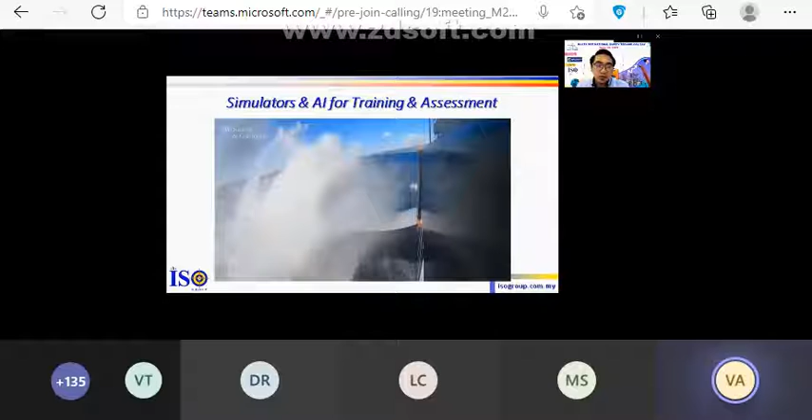He commented that our online training was very interactive. So what did we repackage? New old technology. Let's see what the ETNZ team does. The technology and design can really make the difference between winning and losing in the America's Cup, the oldest sports trophy ever.

The simulator started off as a little Gran Turismo-type steering wheel setup. It's now, in this campaign, a full motion massive surround screen machine with a very strong physics model behind it. You have a simulator that's completely repeatable.

If you give it exactly the same inputs, you can model the same weather conditions and the boat going through the same waves. So if we change the foil from this size to that size and run it again through exactly the same conditions, you can say whether it's better or worse, and measure that accurately.

However, to drive the simulator, you've got to have sailors involved. There's also human bias in the simulator testing. If they know a foil or rudder is bigger or smaller, they expect it to perform better or worse.

So what did we package? New old technology. For example, let's see what the ETNZ team does. The technology and design can make a difference between winning and losing. At ISO Group, we use simulators, VR, virtual reality, and crane lifting planner software, and so on.

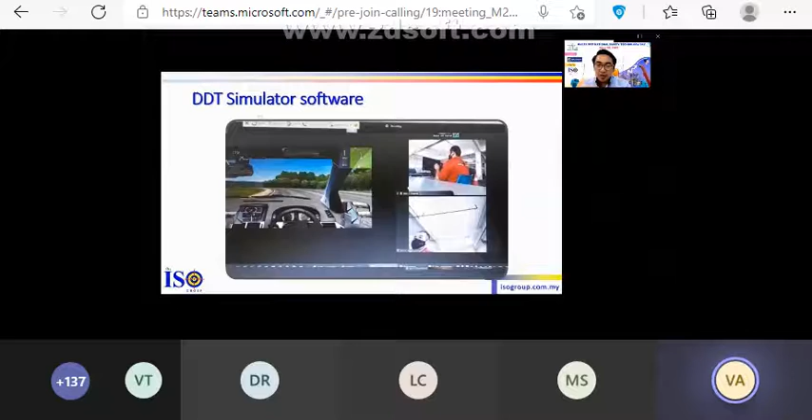It also provides different environments like day or night. I can turn the clock back or forth, make it sunny or rainy, and control the weather, as well as highway or town driving. I would not have the opportunity for these six different scenarios in a 30-minute actual in-cab drive.

Where necessary, we also have options for camera recording for real-time or delayed assessment if internet coverage is weak.

Apart from assessment via simulators, we also conduct on-site practical assessment. We use an online network to assess drivers by setting up several sets of cameras from different angles, connected to other participants' tablets outside the premises, and also online to assessors who can be thousands of kilometers away, like in Taiwan or East Malaysia. The assessor can look at it from a variety of angles.

The assessor can see the participant driving, how they're holding the steering wheel, the following distance, selection of the correct lane, entering a roundabout, recognizing and understanding hazards and action, the REA technique, and attention to other signboards, and so on.

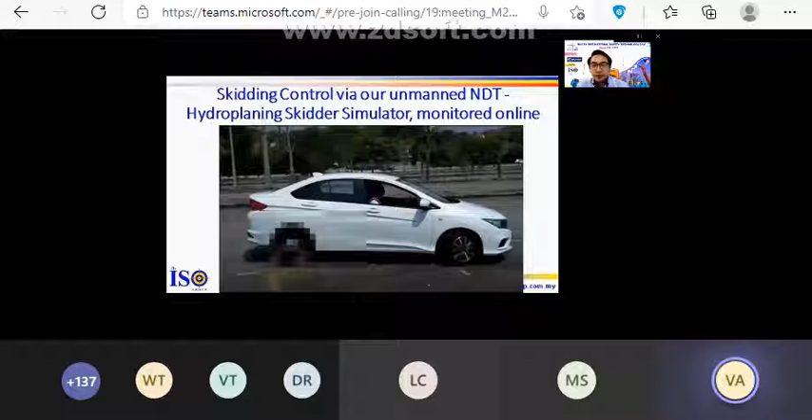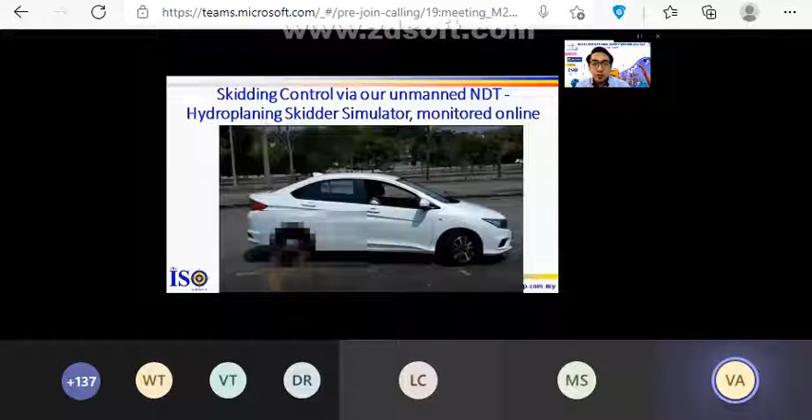At ISO Group, we even re-engineered a non-destructive test hydroplaning simulator, where our trainer does not have to be inside the cabin of the vehicle, to ensure social distancing, especially in a car cabin, which is a confined space.

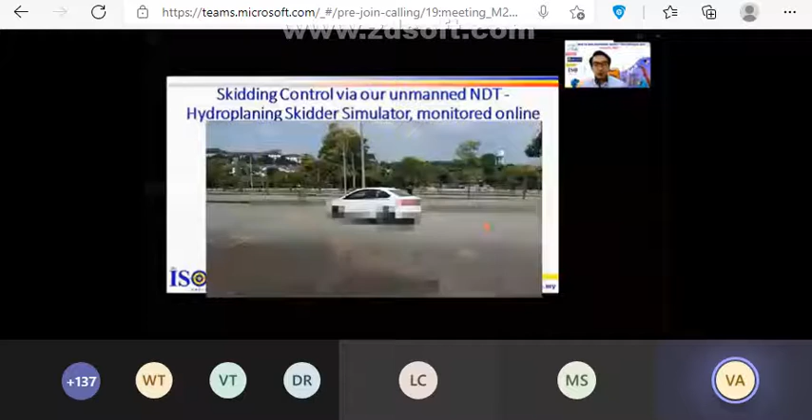We launched this invention and have since been conferred the first non-destructive test hydroplaning simulator by the Malaysia Book of Records. We proposed our VR online OTC inspection training and assessment to the Director General of the Department of Occupational Safety and Health Malaysia, and this program is now accepted by Petronas Group.

Our overhead travelling crane inspection practical is also conducted online.

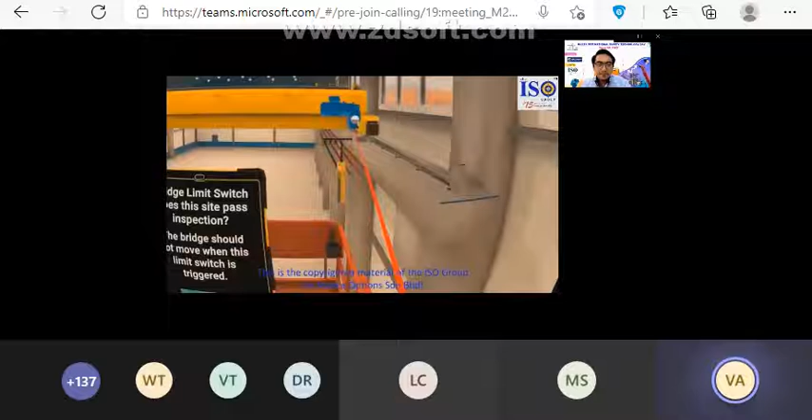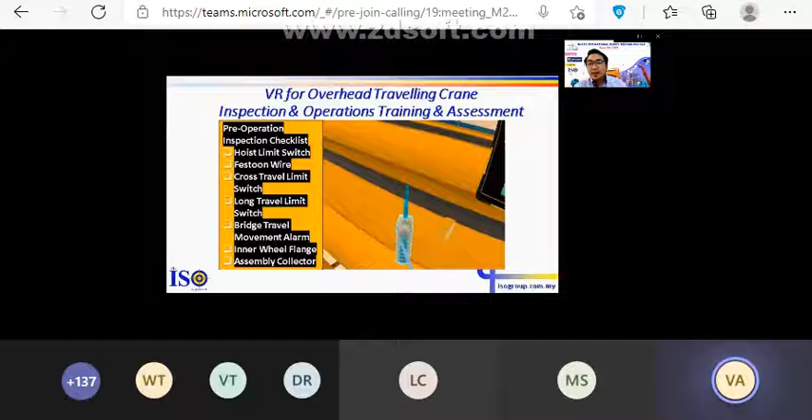It is a full range of inspection for overhead travelling crane, especially in competency training and assessment. Rigging and slinging, the practical assessment using crane expert simulation.

It is for better understanding and more explanation to participants.

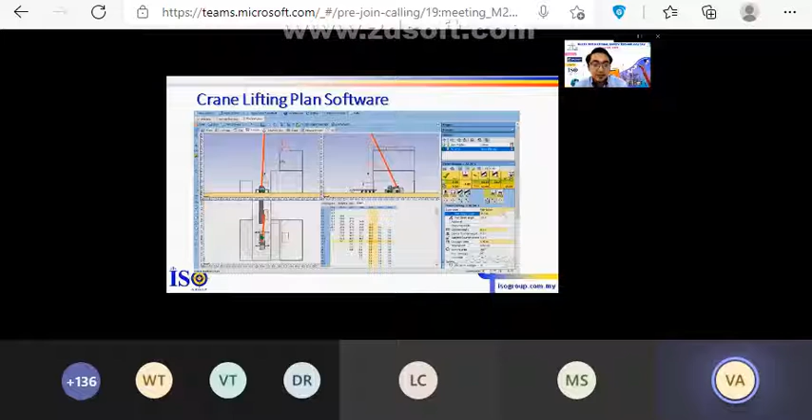It is a full set of equipment with accessories. We loan it to each individual participant for theory and practical training and assessment.

We provide a complete set of tablets with accessories like earphones, chargers, and cables. The tablet includes a SIM card for internet coverage, and a safety helmet with camera for the practical session, an internet router, and other cameras. We sanitize it before and after each training session.

Why do we send a tablet and accessories to each individual participant? We understand the pain point. Workers work from home, children also study from home. They can't use a home computer or tablet if they need to attend our online training. Hence, we provide all the tablets on a free loan basis, no extra charge, and free courier to and fro.

Suddenly, we are all living in a world where minimizing physical contact is a necessity. The advantage of wearable technology and using AI, VR, simulators, or software has become the minimum benchmark.

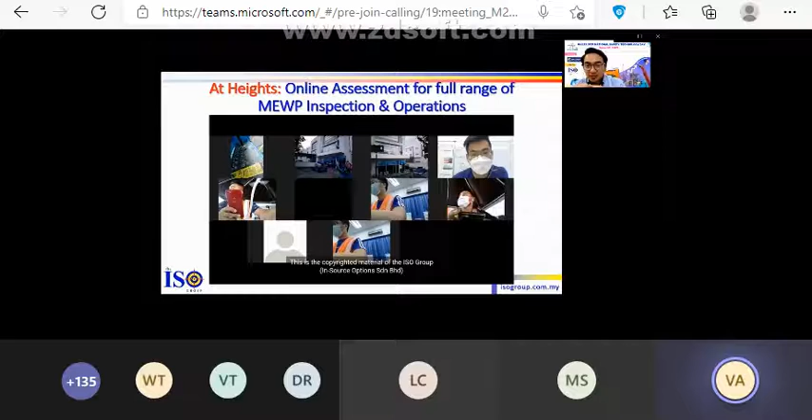The assessor can look at it from all angles simultaneously. That is the power of IoT. Trainees and workers maintain social distancing, with the trainer or assessor absent physically, but the assessor is there online with the operator. The assessor can fully see all the operator and assistant's hand and leg movements, their standing position, even their eyes or head movement.

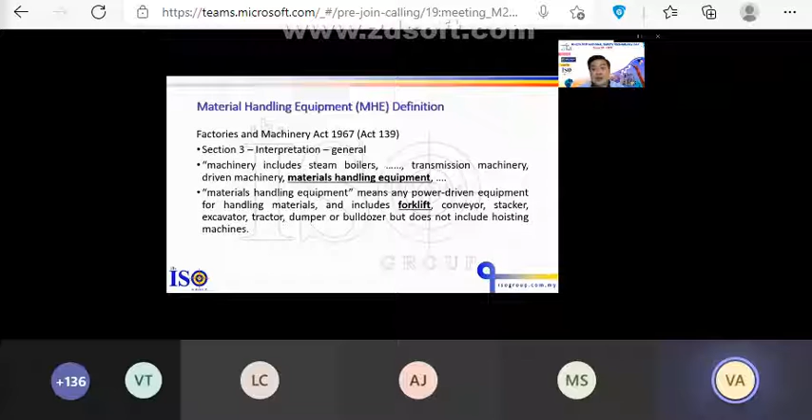Factory and Machinery Act 1967 of Malaysia. Machinery includes driven machinery, material handling equipment. What does material handling equipment mean? Material handling equipment means any power-driven equipment for handling materials, and includes forklift. MHE is now an item listed specifically under machines where the operator requires training. In the USA and other countries, there are laws that term it as powered industrial truck.

Section 26 of the Act: training and supervision of inexperienced workers. No person shall be employed in any machine or in any process, being a machine or process liable to cause bodily injury, unless he has been fully instructed and receives sufficient instruction in work at the machine or process, or is under adequate supervision by a person who has knowledge and experience of the machine or process.

So who determines the sufficient instruction, process, knowledge, experience, and who can supervise? Sufficient instruction and process will cover the tool set, skill set, incorporating load chart, use of other attachments, working in tight environments, minimum movement in darker environments, high-rack forklift operations. Much more than just the training given by another forklift operator based on years of experience. Is that good enough as per Section 26 of the Act of Parliament?

Does the experienced forklift operator know all the tool sets and skill sets I just mentioned? Does the experienced forklift operator want to be held responsible when an accident happens? On the other hand, does any external training company or trainer want to be responsible and go to court if called upon to attend as a witness, ambiguous in terms of his personal experience and certification? What is adequate training?

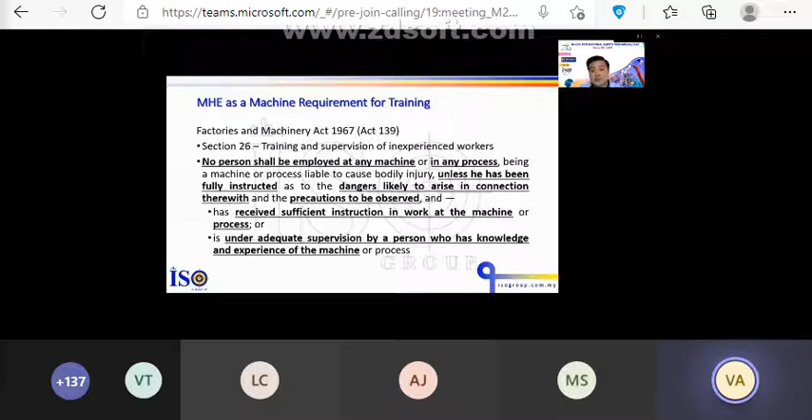Who selects the trainer? It is the safety, warehouse, or training manager. Thus, does this manager understand what is good training for forklift or reach truck suitable for the environment? In the last 18 years, our group can only remember one manager, actually a lady general manager from the UK, attached to a logistics multinational company, who could competently operate a forklift and reach truck.

This situation happened about 12 years ago. There was an HR training manager earlier haggling with Lieutenant Colonel Frank Tan regarding the number of training days and price.

Within 5 minutes of further discussion, the GM assigned the training to ISO group because she understood our detailed and complete system of forklift operation training. My further question is, do normal managers or coordinators sit in on the training sessions, especially when training is being conducted, to check what was promised is delivered by those trainers?

We came across many occasions where the training manager or coordinator showed us course content from another competitor training provider, let's call it Company A, which was a direct copy of our detailed training content. They asked whether we cover the contents as highlighted. Of course we said yes, and explained how it is conducted. Most of the time we asked whether it was what they were told, and they said, this is not what we heard from the other company.

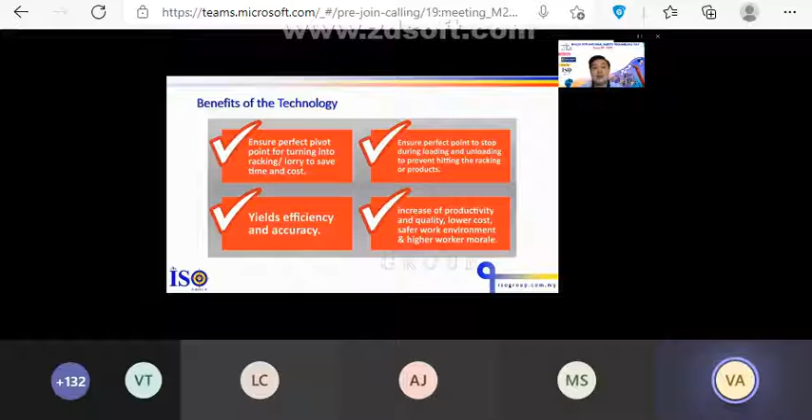Benefits include systematic maneuvering of MHE, not hitting obstructions on the floor, no downtime, optimal fleet size due to productivity in loading and unloading, and savings in equipment rental and maintenance costs. Other benefits include ensuring a perfect pivot point to turn to the side of a lorry or racking or stacking area, and ensuring a perfect point to stop. This yields efficiency and accuracy, increased productivity and quality, lower cost, a safer work environment, and higher worker morale.

This innovative method has been accorded a patent and won multiple awards in Best Innovation, Best Safety, Best Technology, and Best Training from many local and international safety and trade organizations, amongst them ROSPA of UK, ASSE now known as ASSP of USA, and the Malaysian Oil and Gas Services Council.

Our training is adopted by the American Petroleum Institute USA as a behavior-based safety MHE operation training, and our trainers are approved by API USA and various other institutions like the Department of Skills, which is the only government department legalized to issue Malaysian skill certificates in vocational training, blue-collar skill training, material handling equipment, and many other professions. This is all our 11 international and local awards, plus one more just awarded a few hours ago by our

MSLTA chairman, Dr. Noel Robert. This is our forklift, or reach truck - operators should realize that it has become big, very large, like the Bumblebee transformer, so it is easy to become involved in an accident because of its sheer size.

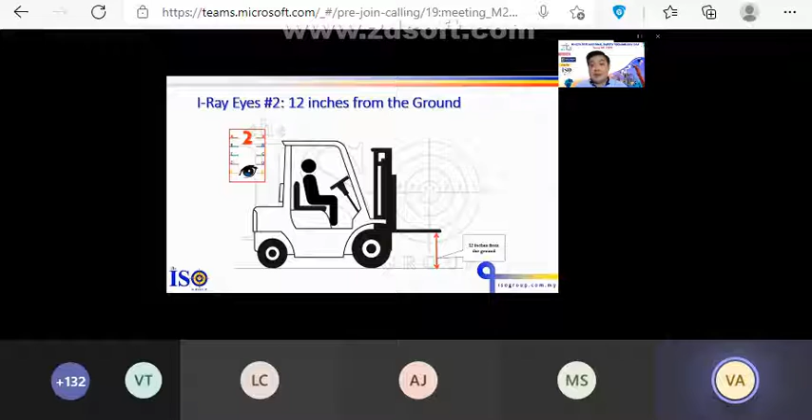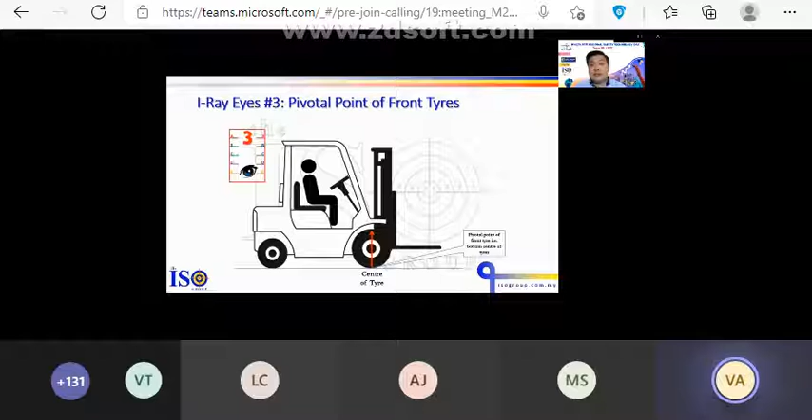Irrespective of the make or model of the forklift. In the case of a reach truck, the indicator is positioned at a different place.

I-Ray Eyes number 4 indicator is positioned at a suitable place of the forklift with the line of sight aligned to the safety line next to the racking or stacking area, or a suitable place next to the lorry, when the tip of the fork is squarely at the safety line.

This indicator is used when the forklift operator performs loading and unloading of a large load. No need to worry that the fork will hit the lorry tires or other pallets on the racking, whether the fork is going up or coming down.

I-Ray Eyes number 5 indicator is positioned at a suitable place of the forklift with the line of sight aligned to the safety line when the backrest of the fork is parallel to the safety line.

This indicator, used concurrently with our standard 2-step method of loading and unloading, will ensure that the backrest does not hit the pallet on the upper racking.

In an incident maybe 8 years ago, the upper load was pushed by a backrest and the pallet with load was pushed down over the other side of the racking. The load dropped and killed the forklift operator's own mother, who was working as a warehouse picker.

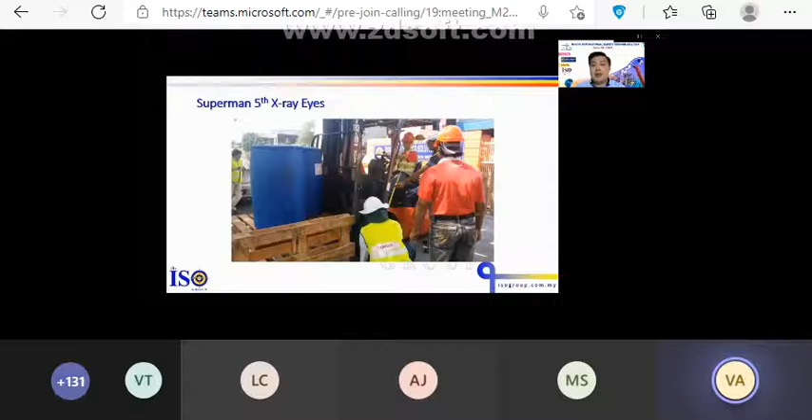The boss of the factory asked us to conduct the forklift training the day after, with a condition to backdate the training certificate. Lieutenant Colonel Frank declined the request. That brings up the subject of whether a trainer will be held responsible for improper training.

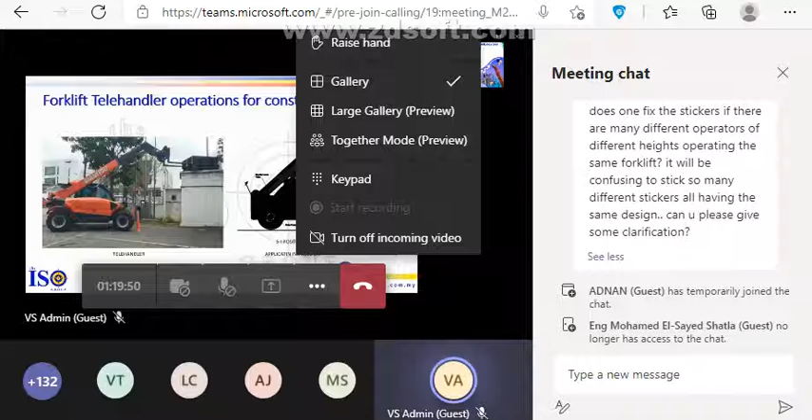This picture shows that the 5th X-ray eyes technology can also be used in forklift telehandler operations.

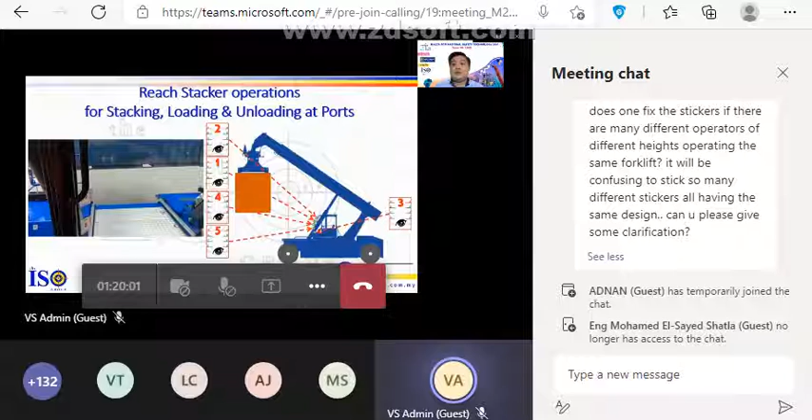Now I will show a video of how the 5th X-ray eyes is implemented for use on a USD 1.7 million, 72-ton reach stacker. Before that, let me narrate a real case study at a seaport in Selangor, Malaysia.

A reach stacker operator was lifting a fully laden container from a stack of many others. The container was lowered from a high stack to the ground level. He was not aware that the container was too low and touched the ground.

When he reversed his reach stacker, the container was dragging on the floor. The reach stacker was holding the fully laden 40-foot container, with total container and load weighing about 31 tons on its spreader. The twist lock on the spreader was literally torn off.

The reach stacker, just like a crab without its claw, became incapacitated and was left idle, having to wait a few months to be repaired. I hope you can understand the loss of productivity from the reach stacker.

Luckily, they had another reach stacker. The Bangladeshi reach stacker operator learned his operation skill from trainers who do not use the 5th X-ray eyes technology. Now we will go into the video.

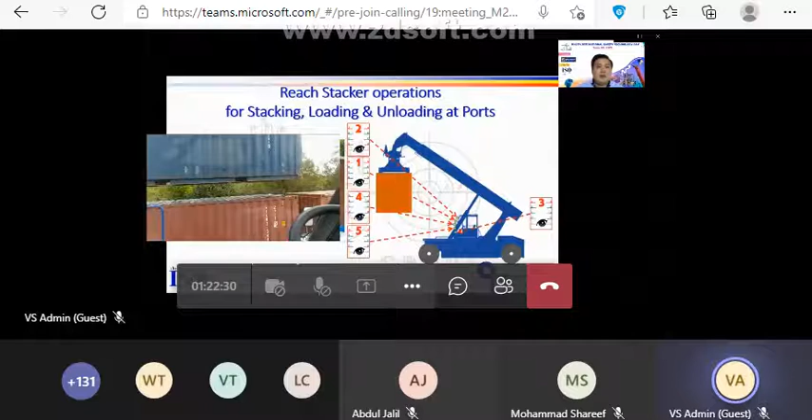Eyes number 5. Squarely going in. Okay, once you squarely going in, we reach number 5, then we will stop. Then we will put our container squarely on top of the container below. So we put it down.

So squarely, is it squarely? Yeah, it's squarely, then only we put down. After we put down, yeah, we open the twist lock. Then twist lock open, then we rise up our boom, our spreader about 1 feet.

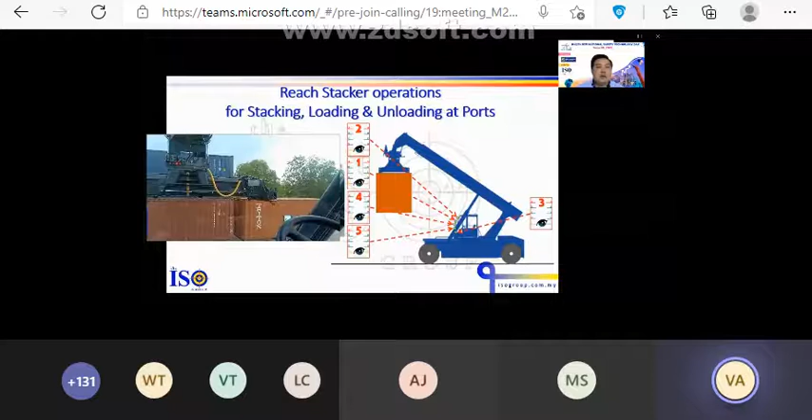After 1 feet, we must make sure it's clear. Once it's clear, then we rise up to 2 feet, then only we reverse out from the container. Once we reverse out, make sure we reverse until number 4. Once number 4 is reached, then we move lower down our boom to number 1, the spreader to number 1. After that we reverse out from the loading and unloading place.

Thank you, ladies and gentlemen, for your attention.

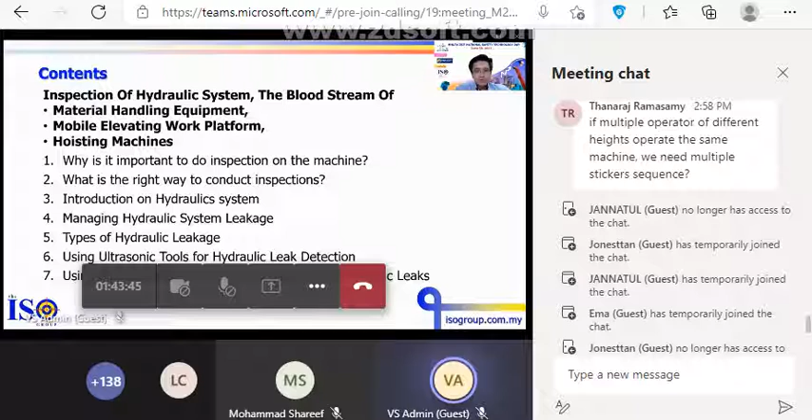Now allow me to introduce my topic. My topic is inspection of hydraulic systems, the bloodstream of material handling equipment, mobile elevating work platforms, and hoisting machines. Now let's get to the contents. Here is my list of contents. Number 1, why is it important to do inspection on the machines? I will show you two incident pictures. Number 2, what is the right way to conduct inspection? Number 3, introduction on hydraulic systems - I will introduce the basic concept of hydraulic systems.

Number 4, managing hydraulic system leakage. Number 5, types of hydraulic leakage - we will talk about external and internal leakage. Number 6 and 7 are some of the ways and advanced tools that we can use to help us in the inspection. We will look into ultrasonic tools and also black light sensitive dyes.

Let's get into the first topic - why is it important to do inspection on the machines? Here is the picture of a real incident that happened. I cannot say where or what company here. However, this is a reach stacker - they are used for lifting cargo containers, usually for stacking containers at a seaport or inland ports. What happened here is one of the hydraulic systems was leaking and then it caught fire.

Luckily, there are fire extinguishers on the machine. So with the quick action by the operator, they prevented more catastrophic incidents from happening.

Most people think it is not important to do maintenance or inspections because the reach stacker is seldom used, or maybe used less because of this Movement Control Order, MCO. But now, as the incident happened, it is a loss for the company, because they lost productivity as the machine took some time to be repaired.

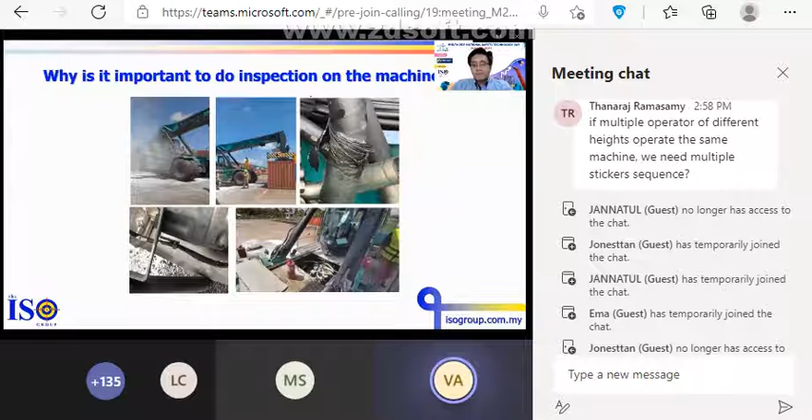Next is the incident of hydraulic system failure on a forklift. As you can see here, the hydraulic oil burst out straight to the operator while he tried to raise the fork mast. Luckily, there was no load on the mast when this happened. If not, the load could topple down and hit the racking system. But still, because of this hydraulic oil, it spoiled their product as it is not food grade.

From the incident, what can you think? What is the root cause here? For me, it could be because no operation inspection is done, or maybe the operator does not know where to inspect. It could be because the cable tie for the hydraulic hose to the mast broke, therefore the hose grazed into the nearby chain. Or also it could be because of the maintenance team's fault — the operator had done the report, but no action was taken by the maintenance team.

So the important thing here is to do inspection for this machine properly. Then we can reduce or prevent such incidents from happening.

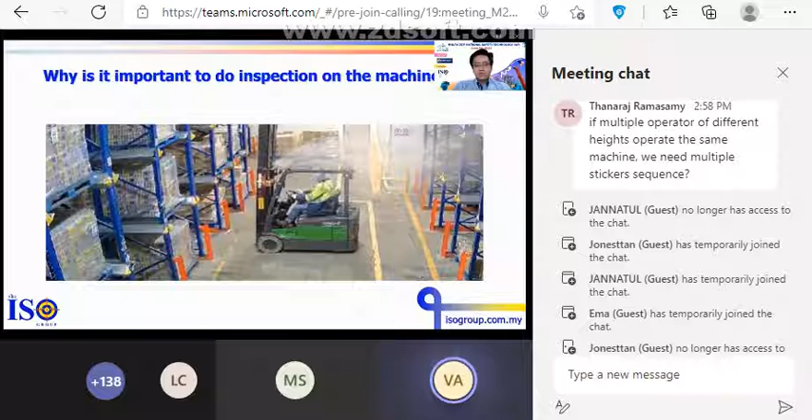Now let's discuss further on the importance of inspections. Number one is for safety, but whose safety? Actually, it's not only for the safety of the operator, but also for other workers and people nearby.

For example, in a crane lifting operation, if any incident happens, it's not only dangerous to the crane operator, but also dangerous to the lifting team working below.

Number two is problem prevention. When we do inspection, we can identify any issue faster and at an earlier stage. With regular inspections, the maintenance team can fix the problem before it causes more severe issues.

Next is increased productivity or increased uptime for your machines, meaning that you can finish your project within the scheduled time.

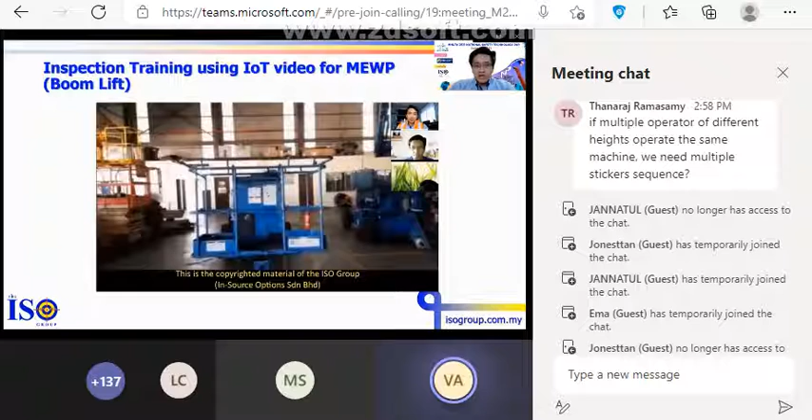Next, I will show you how our company does inspection using IoT during this COVID-19 pandemic. Let's play the video.

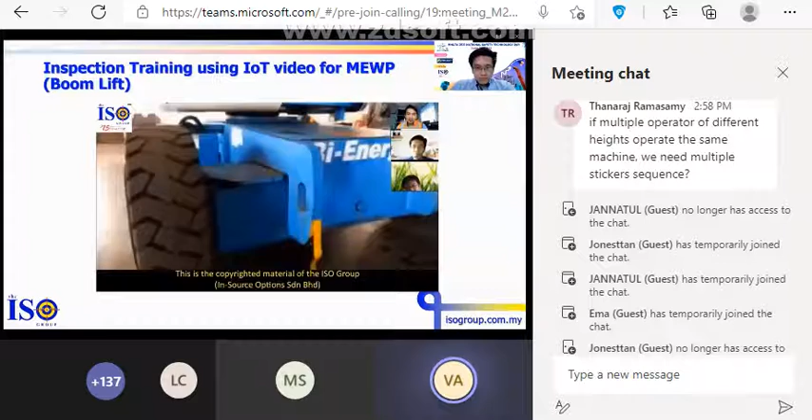Now we do inspection for boom lift. We do visual inspection. We look at the structure here, we look at the hose, we look at the tire, all the nuts, all the decal and sticker. We check the battery.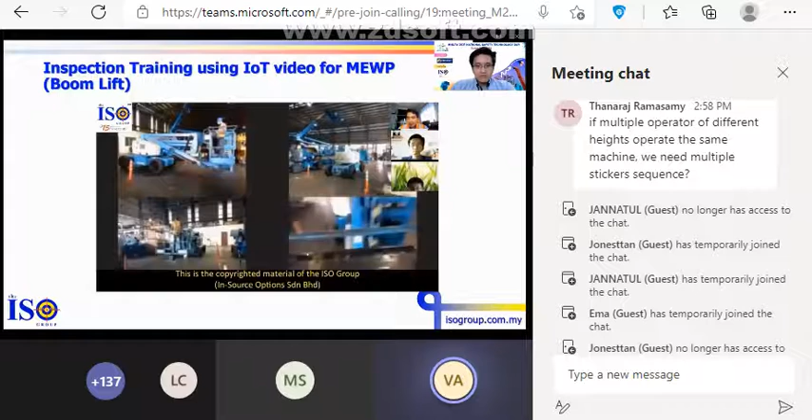Now we check the functional of the machine. We go up, we go down, we move forward, we move backward to check the brake, to check all the steering hydraulics. We extend the boom, we swing the boom.

Now, new topic, introduction on hydraulic system. Let's look at the definitions. The hydraulic system uses a fluid under pressure to drive machinery or move mechanical components. The complexity of the hydraulic system depends on its specific use. However, all hydraulic systems work through the same basic concept.

This picture shows a basic concept of hydraulic circuits. As you can see, the basic components for a hydraulic system are the reservoir tank, the oil filter, the pump, the pressure line, the relief valve, the control valve, the piston, and the return line.

So how does it work? The hydraulic oil from the reservoir tank will be pumped to the cylinder. It will bypass the relief valve and the control valve, so the control valve will direct the fluid into the specific piston or cylinder. The pressurized fluid will push the rod forward or move the rod attached to the moving component of the machine. Then the low pressurized fluid will return to the reservoir.

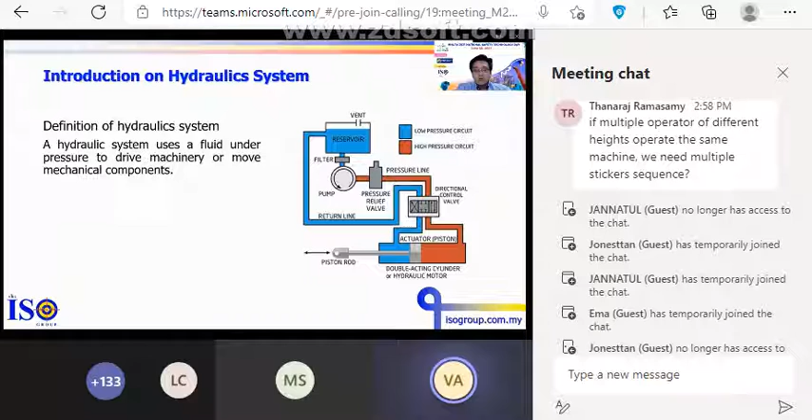This is just the very basic of hydraulic circuits. As you can see, if any component is broken, it will affect the whole hydraulic system. Let's see the basic flow of hydraulic system in our machines.

Next topic is managing hydraulic system leakage. It is really unfortunate if we cannot identify any leakage on our equipment, but it is even worse if the leaks identified are left to drip away. In some cases, they don't bother to repair the leak because the leaks are very small, so they just top up the hydraulic fluid if the level is low. Actually, we lose more than the fluid cost.

Our profit goes to unnecessary energy consumption, our equipment performance reduces, our machine reliability decreases, we increase our housekeeping cost, and our maintenance cost also increases. But not to forget, these small leaks can damage our whole hydraulic system because it can severely affect the hydraulic system for the machine.

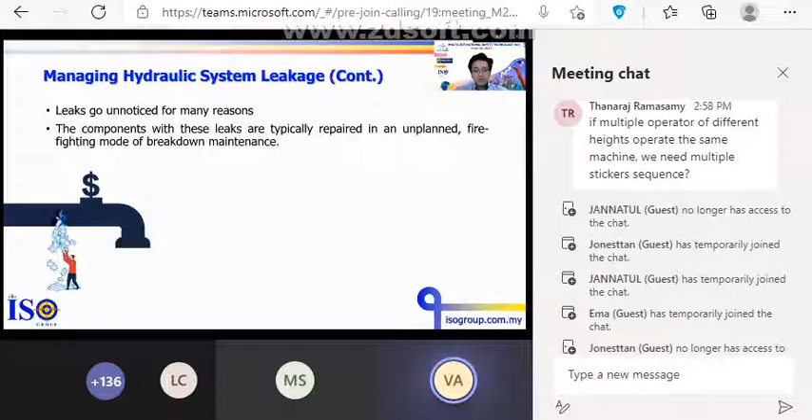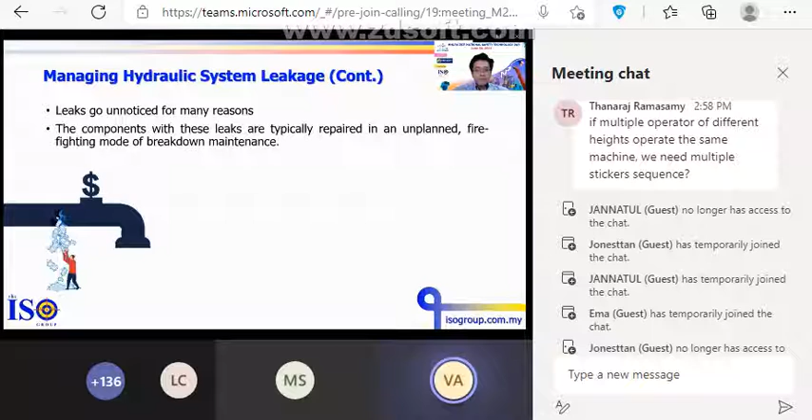Next, leaks can go unnoticed for many reasons. This is because there is no visual indication to alert the operator or technician until the system has been severely affected. The component with leaks is typically repaired in an unplanned firefighting mode of breakdown maintenance.

Then I will talk about the types of hydraulic leaks. Before you can identify and control hydraulic system leakage, you need to know there are two types of leakage. This is something that every company with hydraulic assets should be interested in. The hydraulic system can leak both externally and internally, causing different issues and requiring different solutions. This problem can be tackled in a variety of ways.

For example, number one, make a simple lubrication change. Number two, use advanced technology tools to help detect and manage the hydraulic leakage. Both of these solutions I will elaborate more later, but keep in mind that the key here is to approach with faster, earlier detection, and fast response.

Now let's move to external leakage first. External leakage is the most recognizable type of leakage. Even the untrained eye can easily spot a broken hose spewing oil. This type of leak is typically repaired quickly because it affects the production line or process.

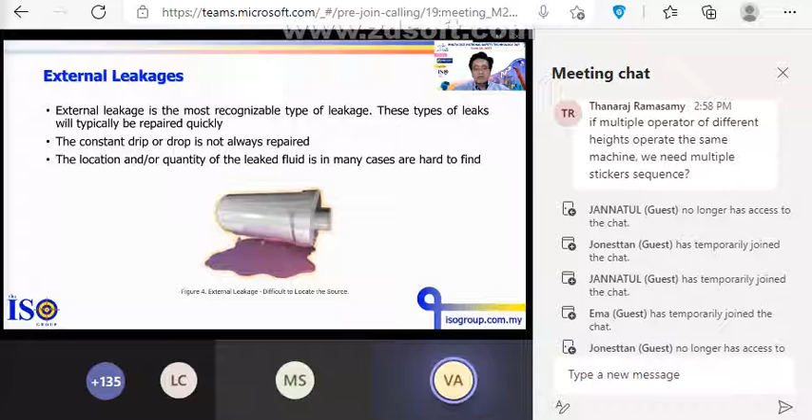But sometimes a constant drip or drop is not always repaired because the system performance and production are not affected, so they just let it be. In some cases, the location of the leak is really hard to find and the repair is not worth the effort, so they also just ignore the leaks. Eventually, many companies spend tens of thousands of dollars a year replacing top-up fluids because they don't really understand the financial impact of a leakage.

Therefore, the detection and quantification of fluid consumption is the first step in external leak control. One way is to maintain an up-to-date reservoir management to determine when, by whom, and also by how much fluid was required to top up a reservoir. This record should be used along with visual inspection to determine the location and the leak rate of the hydraulic system.

This is the leak classification table. It can be used as a method to quantify the leakage rate, and the location will allow for the opportunity to prioritize the repair. From this table, there are 6 classes of leakage. A higher number represents a higher leakage rate.

In many cases, the source and quantity of the leaks cannot be determined as they are difficult to see. Best practice recommends occasionally cleaning the area and fully wiping down the equipment to examine the leaks.

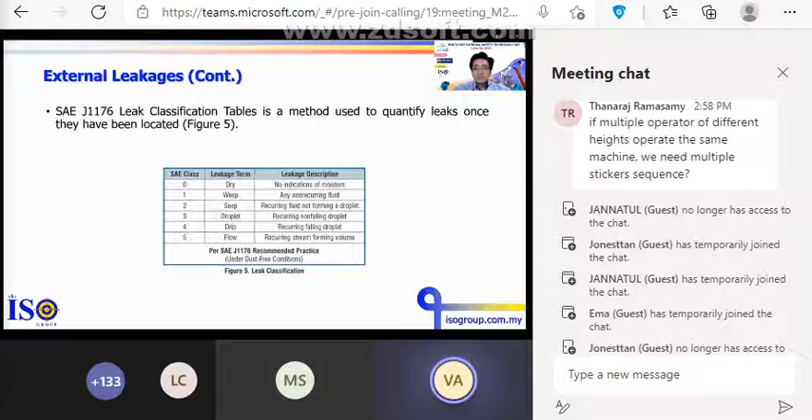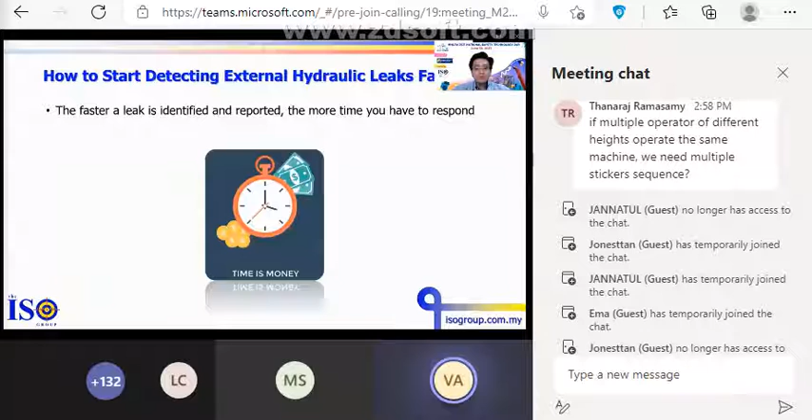Now we're looking at how to start detecting external hydraulic leaks faster, because the faster a leak is identified and reported, the more time you have to prevent problems like a last-minute breakdown or total damage to your hydraulic equipment. There are many ways to help yourself, maintenance, and operators identify leak problems more quickly. Now we look at some of the methods.

In order to detect external leaks faster, we should consider using hydraulic oil with a distinctive color. When using a specific or distinctive color compared to other lubricants and fluids for your equipment, this can help us identify leakage faster. With this method, both skilled and new staff can easily identify the leaks.

The next method to help detect external leaks faster is to properly train your staff. They need to know where to look, what to look for, and how to report it. They have to inspect all hydraulic components to see any leakage. If the hydraulic oil used is a different color, it's easy to instruct them to report it, for example, green fluid leaks or whatever color your hydraulic fluid may be. Then the maintenance teams can take immediate action.

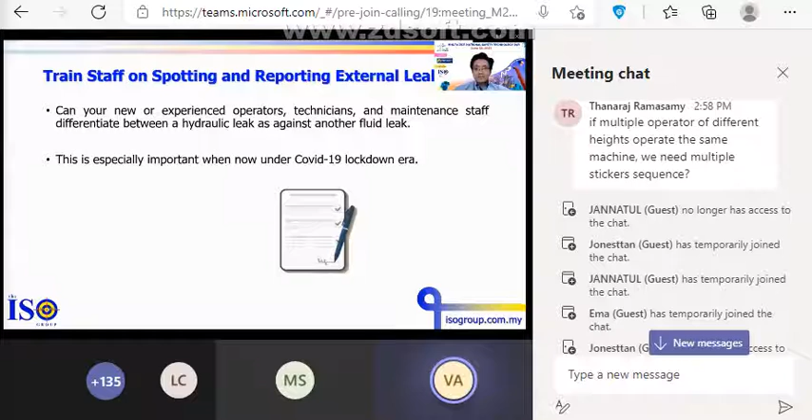To do the repair. Next, I will talk about internal hydraulic leaks. Not all hydraulic leaks are visible or even necessarily bad. What I mean here is that for internal leaks, there are planned hydraulic leaks and unplanned hydraulic leaks. The vast majority of hydraulic systems in operation today have leaks that are planned.

For internal planned hydraulic leaks, they are designed with a specific function in mind, and in many cases, they are documented by the original equipment manufacturer (OEM) as an amount of acceptable leakage under normal operating conditions. Typically, this internal planned leakage is meant to lubricate, clean, and cool a specific component or area of the machine.

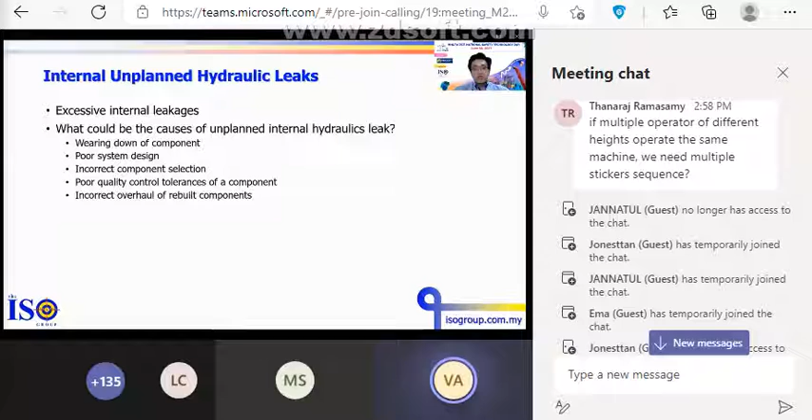Internal unplanned hydraulic leaks are the area you all need to be concerned about. The list here shows the most common causes of unplanned excessive internal leakage. Number one is the wearing down of component surfaces during operation, for example, a worn seal or a worn cylinder barrel.

Next is poor system design or incorrect component selection, which may happen during manufacturing or maintenance. Next point, poor quality control tolerance of components, which is also related to the manufacturing of the components.

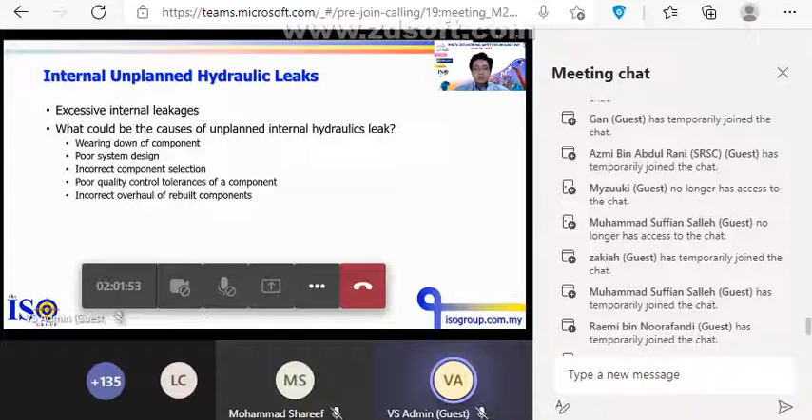Last point, incorrect overhaul of rebuilt components. That's why you need to keep in mind that a thorough inspection needs to be done every time after the equipment undergoes a major maintenance repair.

Now let's see the first warning signs of excessive internal hydraulic leaks. The signs are a decrease of system performance or reliability, and also an increase of operating temperature. If you notice any of these signs on your hydraulic system, there is probably excessive internal leakage happening in your machine.

A common scenario is when a major power loss in the hydraulic system occurs. It's usually because of internal leakage in the pumps and motor. This leakage is the result of excessive clearance within the pumping mechanism of the pump and the motor, resulting in reduced volumetric efficiency.

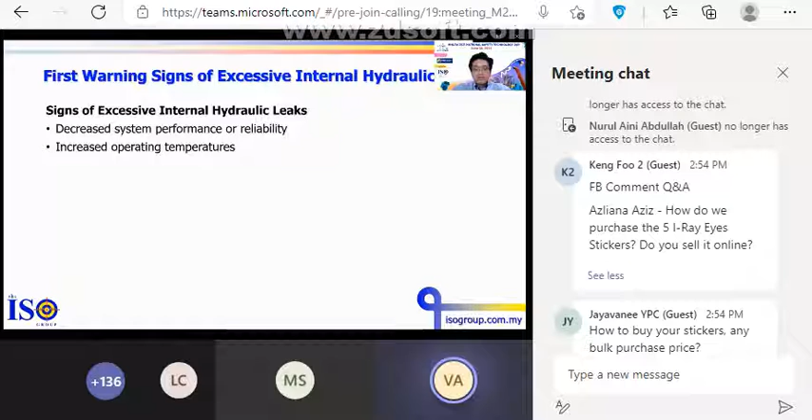Slippage is a common term that we use to describe the volumetric loss, and it is typically identified when the input energy remains the same or higher, but less work is being performed in the hydraulic circuit.

Here are more examples of internal leaks. In a spool valve, excessive internal clearance between the spool and the valve body could decrease the control and stability of the hydraulic circuits and their functions.

Energy loss is the result of energized fluid being allowed to escape back to the reservoir through a spool valve that has an out-of-spec clearance problem. A relief valve or other spring offset valve with a weak spring or a jam-open condition will have the same effect of fluid energy loss by allowing the pressurized fluid to bypass the working circuit.

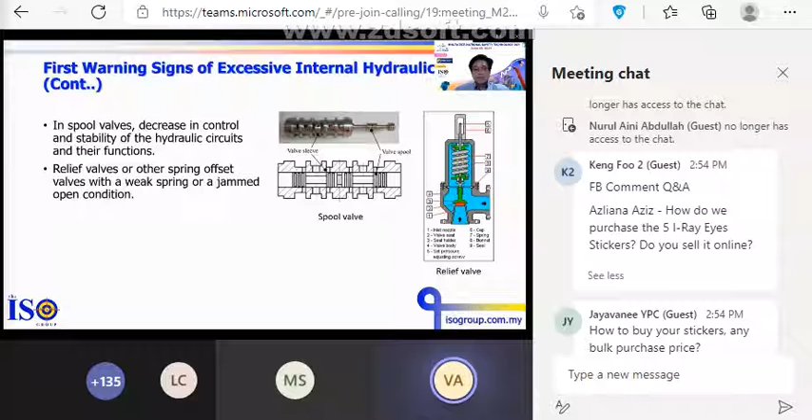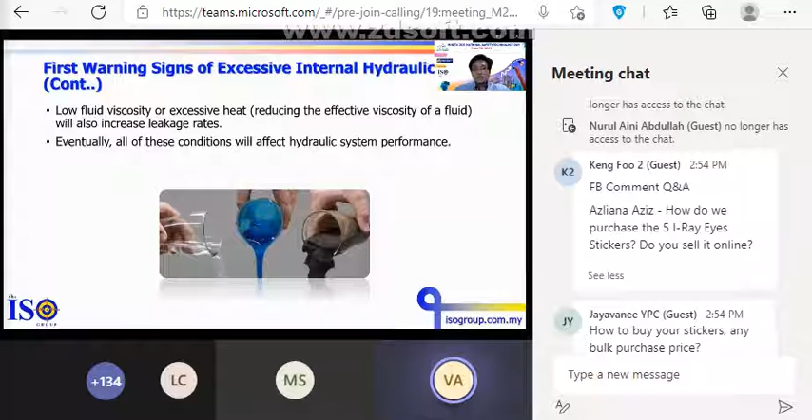Another sign is excessive heat. Excessive heat can reduce the effective viscosity of a fluid, and this will also increase the leakage rates. These types of internal leakage reduce system performance and decrease the fluid film strength, which will also result in premature wear of the equipment surfaces and the fluid's properties. Eventually, all these conditions will affect the hydraulic system performance for your machines.

Next, how to detect internal hydraulic leakage. You can use a non-contact infrared thermometer to help measure the operating temperature of your equipment.

Heating of hydraulic fluid during operation is caused by inefficiency. Where there is a pressure drop, heat is generated. Therefore, if there is internal leakage, it will increase the heat load on the system and can cause it to overheat. With this kind of tool, you can identify and change the faulty component.

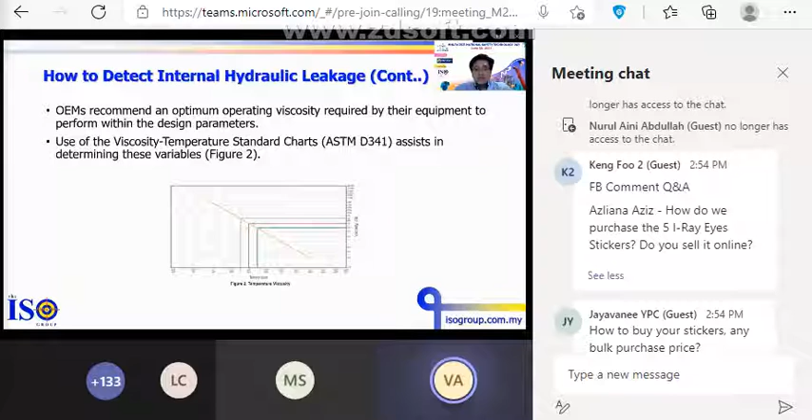In many cases, selecting a fluid and maintaining an operating temperature which achieves the OEM recommended viscosity becomes the responsibility of the end user. So you can use viscosity-temperature standard charts to assist in selecting the fluid and maintaining the operating temperature, especially at the critical components of your machine.

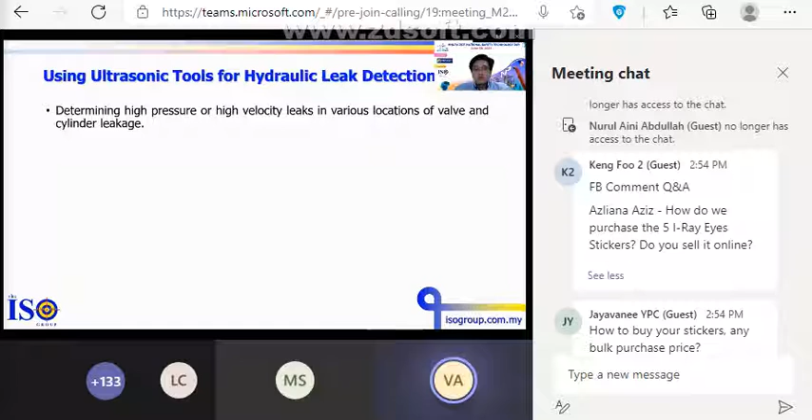Another great method here is to use ultrasonic tools. Ultrasonic detection has proven to be another effective method of determining high pressure or high velocity leaks in various locations of the valve and also in the cylinder. These methods assist in localizing the internal leakage, but similar to temperature reading, the results are not quantifiable into the amount of leakage.

Another great method here is to use black light sensitive dyes. This liquid dye is formulated to be compatible with the existing hydraulic fluid and the mechanical surfaces. The dye is mixed into the reservoir, then the mixture will emit a bright green or yellow glow when struck by the ray of black light. As shown in the picture, you can easily spot the leaks.

On the hydraulic hose here, this method is great when the leaks are too small or too numerous to see clearly, and it can also help maintain the exact location of the leakage in the equipment.

Here are simple steps that are a great place to start improving your hydraulic leak detection and management with very little associated cost or effort. Start by taking a closer look at your record keeping and surveillance to understand the trends over time. By matching this data with a robust plan for performing repairs, significant progress can be made for your hydraulic work equipment.

In summary, I hope now when we think about hydraulic system leakage, we know there's a lot of issues associated with it. We are losing power, we're losing reliability of the machines, we're losing the fluid, we're losing time, and of course, we're also losing money. There is so much cost related to this, not only the fluid cost, but also the downtime, handling cost, and waste management cost, and the list will keep going on.

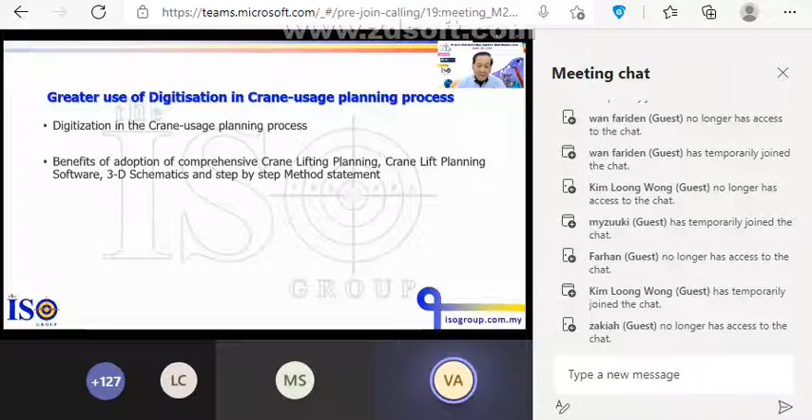New building materials and innovative construction approaches, such as pre-assembled modules, can lower costs and speed up construction and shutdown turnaround time, while improving quality and safety. However, this will require more sophisticated, specialized transportation, lay-down mode requiring upturning upon arrival at destination, and crane lifting efforts due to its sheer size, off-balance, and non-uniformed asymmetrical load.

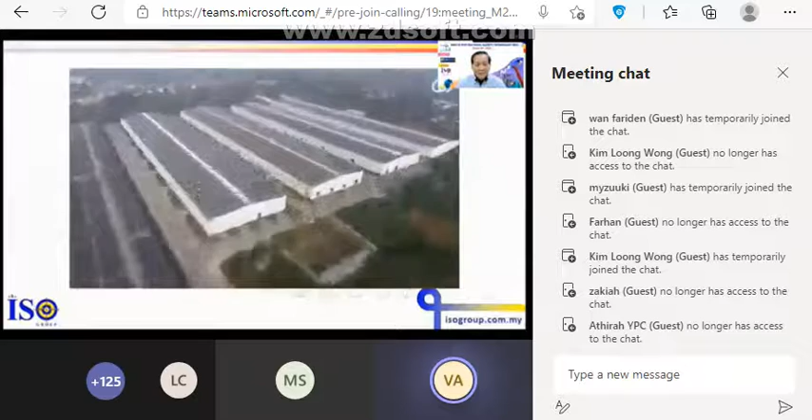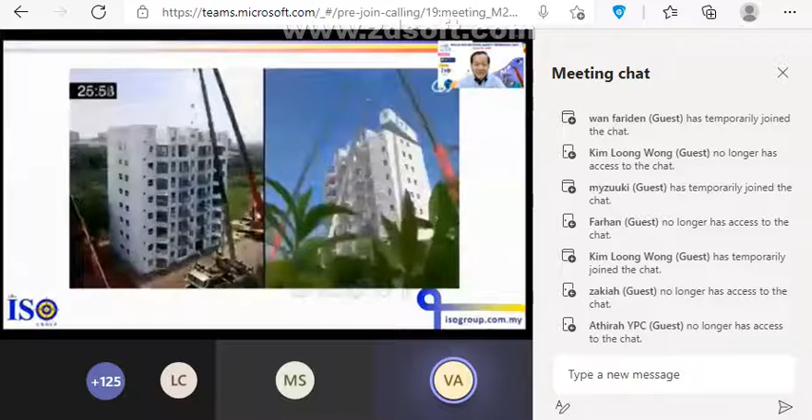Oh, modular. Already. Lift it up by this. Okay, and it's ready. How nice. Fast. Clean.

Project owners often believe that their responsibility ends when they award the contracts. They forget that they pay the economic cost of delay. On the other hand, contractors often do only the minimum required to meet contractual terms. Given the construction industry's poor track record on innovation and adoption of new technologies, tools, and approaches, we feel that both project owners and contractors need to adopt a new mindset for their own welfare.

Singapore Building and Construction Authority confirmed that prefabricated, pre-finished, volumetric construction (PPVC) gives a positive impact: productivity improvement of up to 50%, minimal dust and noise pollution, and improved site safety. An ecosystem should be built to benefit the whole society.

In view of the large number of more than 30,000 cranes in operation in Malaysia, and a large number of recorded accidents - I repeat, recorded accidents, I don't know how many are not recorded - it is pertinent for us to discuss today how digitization, especially using crane lifting software, can help in eliminating accidents.

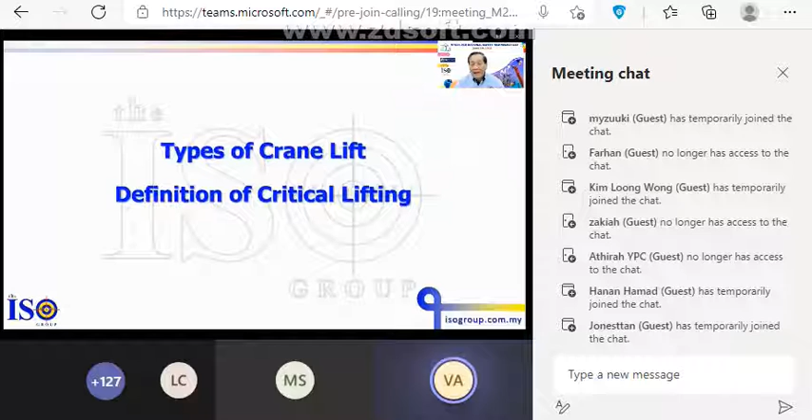In which a lifting plan is necessary, when it can be best counted only by a lifting software. The International Standards Organization number 12480 Part 1 of 1997 clarifies the safe use of cranes. But how many people do follow it?

Many industry players and organizations, committee members locally and abroad, do not take the lead or even go against the best practices, whether in poor crane deployment, maintenance, or training requirements. We see their cranes involved in accidents. Very sad. On further investigation, we notice that all these can be avoided.

There must be a wake-up call for all stakeholders, inclusive of the general public, to look into this very urgently. Standards and regulations include the ISO Standard 12480 Part 1 I just mentioned, BS 7121 Part 1 of year 2006, which is the British Standard for Code of Practice for Safe Use of Cranes Part 1, and British BS 7121 Part 3 of year 2000, the British Standard Code of Practice for Safe Use of Cranes for mobile cranes.

And we also have the International Labour Office Safety and Health in Ports Code of Practice from 2005, and the Accident Prevention Regulation for Cranes, BGV D6, issued by the German Institution for Statutory Accident Insurance and Prevention, and many more overseas and locally. The current operational safety practices at most construction sites and upstream manufacturing companies using mobile or crawler cranes is very, very lacking.

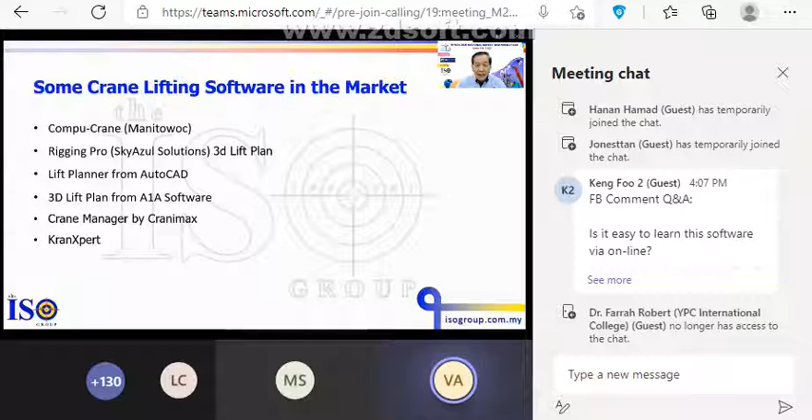Some of the notable lifting software we want to talk about are Compu-Crane of Manitowoc, Rigging Pro, SkyAzul Solutions, Lift Planner from AutoCAD, the 3D Lift Plan from A1A Software, Crane Manager by Cranimax, and of course the KranXpert - we love KranXpert.

Compu-Crane Manitowoc is a basic, easy to use tool, suitable for simple lifting, bidding, or presentation purposes. You need it for bidding or even presentation.

For more complex lifts, you need, in our opinion, a more sophisticated software. Rigging Pro from SkyAzul Solutions complements the Compu-Crane software. It automatically develops a sling model and applies the sling hardware properties, structurally analyzes each element for quick confirmation through a color-coded 3-dimensional image. It defines load dimension, the hitch type, and adds hardware like collector rings, shackles and fittings to the rigging plan, with a useful interface and a database of Crosby's hardware and anything else you want to add.

It provides detailed working drawings of the load and rigging with specs and bill of materials. You specify the load parameters and the hitch type. It calculates the center of gravity and sling tensions, and displays your rigging assembly in 3 dimensions. The load can be viewed from all sides, it calculates the loads, evaluates the capacities, and even alerts you of any potential hazardous situations.

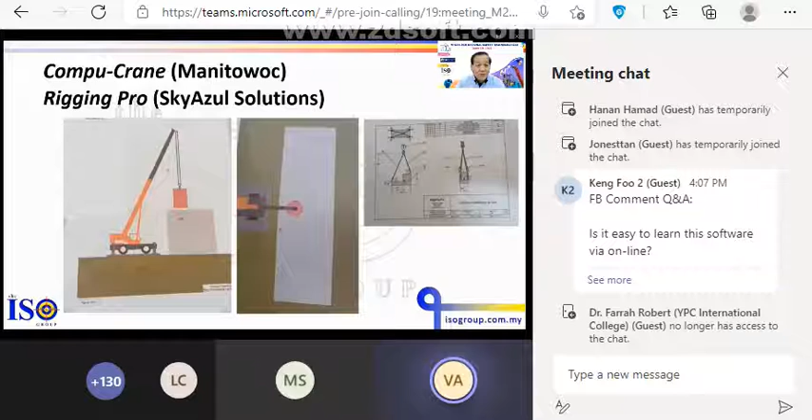In the case of Lift Planner from AutoCAD, a 3-dimensional lift study can be produced at the end, but you need to actually know AutoCAD - otherwise it will be quite useless to you.

It allows configuration of the crane. You move the crane, swing the boom, set the hook elevation, and boom up or boom down. You can also do telescopic adjustments or change the jib angle - that's where you see what happened. You cannot do this in the real world of work because it's not allowed when the load is hanging on the hook.

But many people perform it in the world of work, and that's where you see a lot of crane failures. Lift movie comes along for presentation and also for pre-lift meetings.

Very useful. The other one we know of is 3D Lift Plan from A1A Software. This program is graphically very nice. It is sophisticated for simple jobs, not restricted to any crane type, and linked-back crane charts are already available. For many other cranes you need to purchase access for maybe a year-limited period, but the host actually has more than 700 cranes available on its server, if I'm not mistaken.

The program features advanced crane selection, ground bearing pressure calculation, crane match calculator, critical lift worksheet, sling tension and dimension calculator, and advanced rigging design. Capability includes planning of multiple crane lifts, export to CAD at the end, use of multiple parts of line, and display of images from your job site. You can plug in - and that is KranXpert.

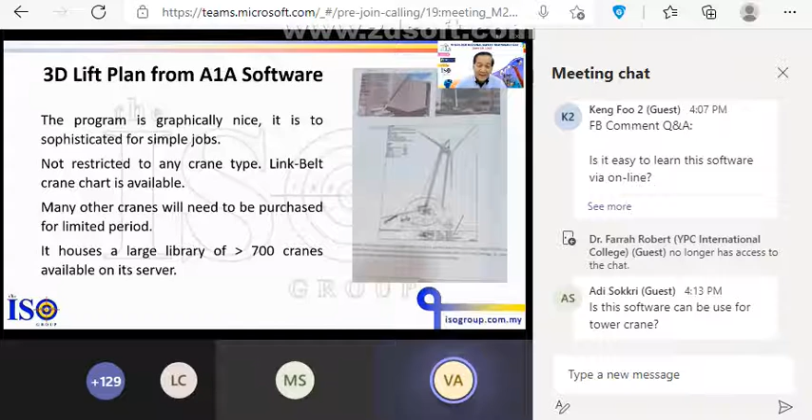We love this, and we are using this software in our office and our setup. We use a paid version to teach our participants, and of course we give them the free software to try it before they decide they would like to buy it.

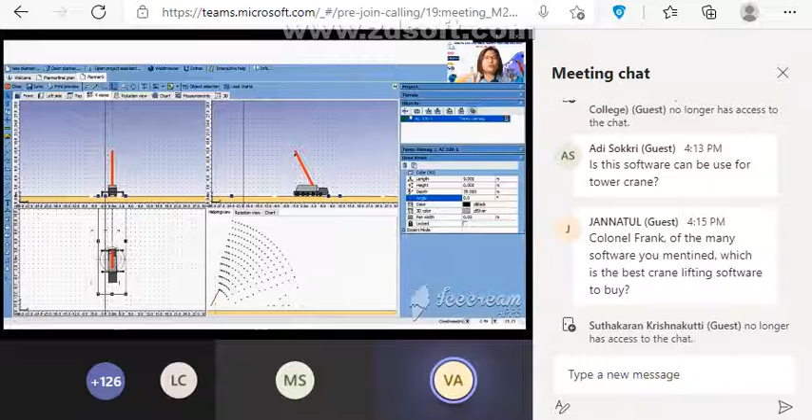Number 1, possibility of the boom hitting the building, rooftop, or platform. Number 2, ensure boom safety clearance, identifying the required distance, for example a 4-meter safety clearance. Number 3, ensure sufficient clearance of the counterweight, for example minimum 600mm from the wall.

In this crane lifting software, you can see there are 4 standard views. Quadrant 1, top left, is the front view. Quadrant 2, top right, is the side view. Quadrant 3, bottom left, is the top or plan view. Quadrant 4, bottom right, is the 3D view.

The user of this software is required to key in the details of the crane specifications. In this paid software, you just need to key in the crane name and model, and all the specifications will be automatically drawn or configured from the library within the software. You can draw the real scenario in this 3D lifting software.

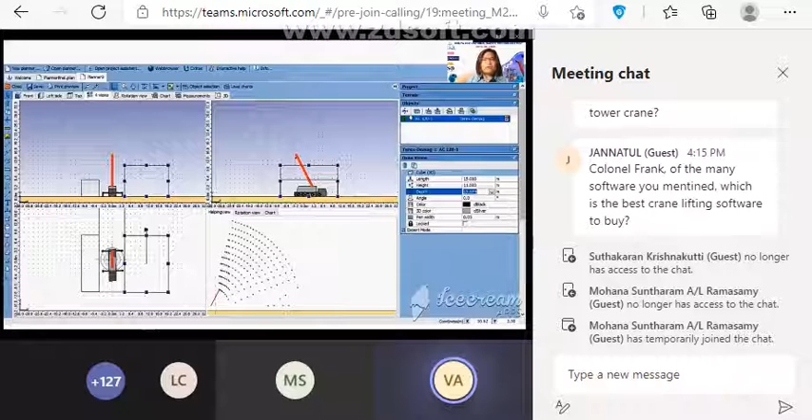See this video. Step 1, select the crane with the specific axle from the specified crane model manual. Step 2, set the boom length required. Step 3, set the counterweight. Step 4, set the outrigger base width required.

Step 5, set the loads, length and width in the right-hand panel. You can pre-select the load shape, whether it's a cube shape, cylinder shape, or rectangular prism shape.

Step 6, simulate the crane lifting. The 3D comes alive in lifting. This is the fun and exciting part.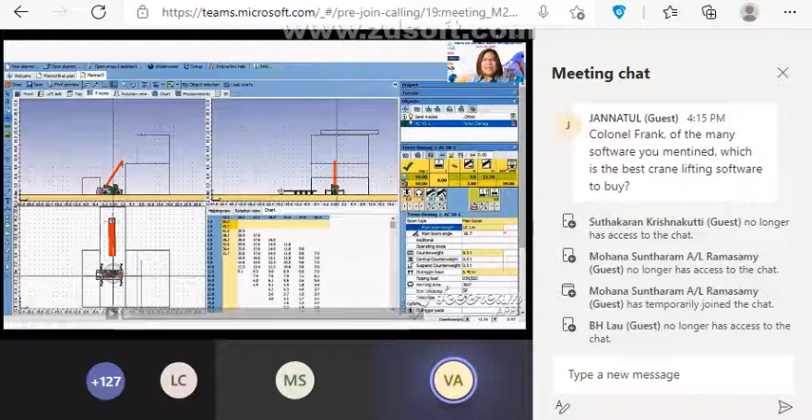If we refer to this video, we can see every movement of the lifting in detail and from multiple different dimensions, whether the load, the boom, or the counterweight is hitting any object nearby. So we can plan and revise our method statement in writing.

Thereafter, during our training, we will guide you on how to write a detailed method statement into a crane lifting plan, to keep a written record of the lifting plan and method statement. As a crane lifting planner, it is important to inform and explain the entire lifting plan to the lifting team members and to establish a mutual understanding among the crane lifting team members.

I will now show you a video clip of a training on how to use the Crane Expert software. From this video, you will see how easy it is to use the software to develop a detailed method statement to eliminate all crane operation accidents.

Of your outrigger. Now, next is your boom offset. Okay, from your boom pivot point. Okay, so you can see the object. Okay, Tiang, hold on, let me take over control. I will request remote control and you can see from here. Okay, now I'm controlling your laptop. So right now, if you look at this screen, by this ruler and this ruler over here, as you can see, all these screens, all 3 screens have rulers. So I can move it around here.

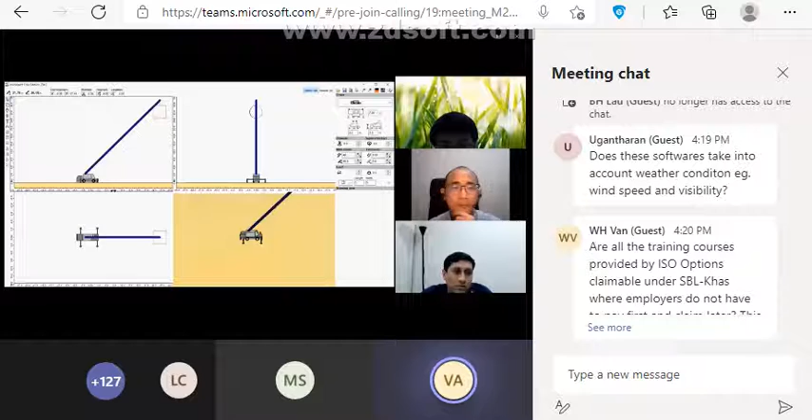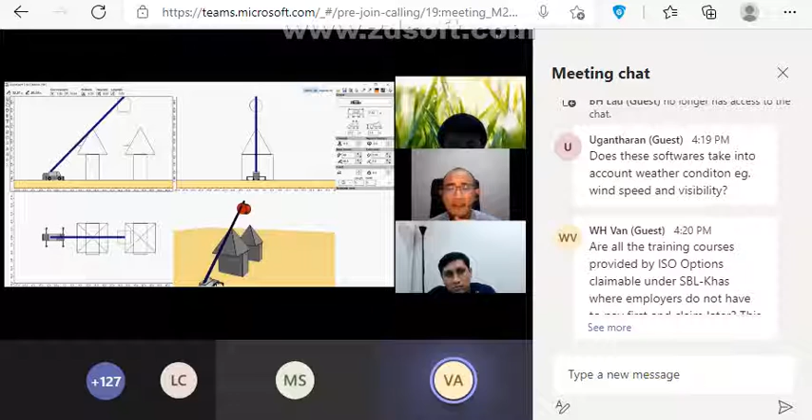We want to be able to put a name to it, or we need to label the item. Now I have 2 objects, so I have to move it slightly to this side. I need to place my load right in the middle of these 2 objects here. So I will need to increase my boom angle. But as you can see here, the height of the building gives me a problem. So I need to make sure my boom does not hit the building and I'm still able to put the load down without hitting it. So I can turn my 3D building, and have a very good view of how the load is going to be when I move it or lift it. Will it hit the roof? Will it hit? Or what are the procedures I need to do? That's a very good idea, that I can imagine how the thing is going to be.

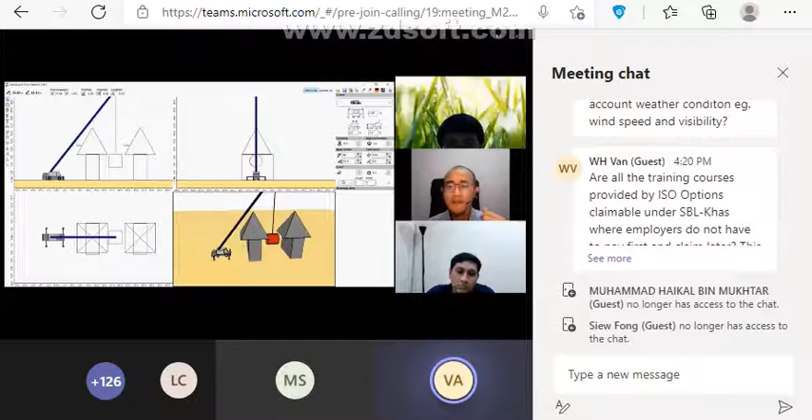Okay, thank you Miss Emily Chan. Now, the latest development in Malaysia regarding crane lifting: the Department of Occupational Safety and Health, on 5th June 2017, 13th March 2020, and 26th October 2020, issued 3 special orders that all lifting team members must be knowledgeable, experienced, and competent, and further confirmed there must be no bypass of the machines, and a permit to work or crane lifting plan must be made available.

And let's see what happens here.

Very unfortunate, hundreds of thousands lost. Could have been prevented. Unfortunately, people think it couldn't happen to me.

So what happens when training providers heard about this circular? Many of them jump on the bandwagon. We were doing this training for years already, but now they see this circular and they look at it as an opportunity.

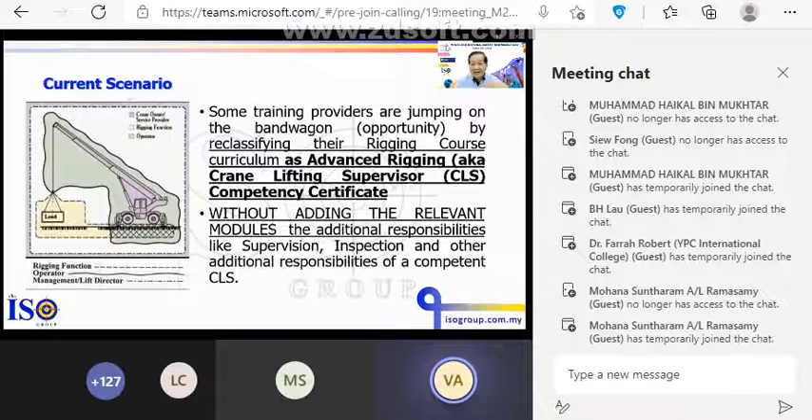In the case of CLS, the crane lifting supervisor, as the title says, is to, amongst many other things, explain, supervise, and ensure continued compliance to the crane lifting plan. And if they have an issue which they cannot comply with, they have no authority to do anything except to get the approval of the AP, appointed person, or the crane lifting planner.

In some countries, they call it crane lifting engineer. The crane lifting planner, on the other hand, is responsible for amongst many, many other jobs - I will determine some here. One: determine whether in the first place it's a routine or a critical lift.

Recce the environment - pylon electric, ground bearing pressure, and so forth. Buildings, structures, and so forth, and whether the crane will come near us. Create the lifting plan. Determine whether more than one crane is necessary in the case of tandem lifting. Refer to manuals for specifications, limitations, and crane charts and so forth.

Not only the equipment but also the accessories. Determine appropriate types of setup of the crane. Understand the integrity of the load. Provide a 3-dimensional lift schematic.

Write a sequential method statement from the rigging till deposit, de-rigging of load. Determine the extra requirements when man lifting is performed. What contingencies are there - the time, weather, the environment, and the duration of the lift operation. These are some, not all.

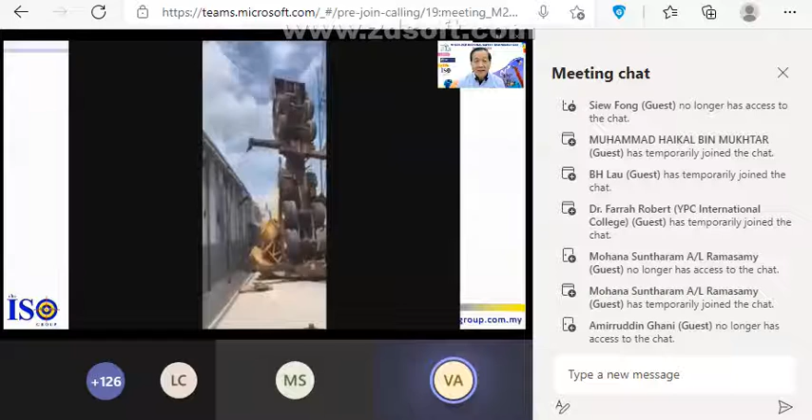Let's see what we have here. Oh, it's an accident. This is a factory outfit, and a mobile crane was used to lift out. What happens over here? Suddenly, the whole thing collapses along with the mobile crane. Anybody in the environment, I will pity them, because they will lose their leg or hands or their life.

This is not what we want. We want everybody who comes to work to be safe to work, and safe back home.

Many in the general public think crane accidents only happen on construction sites. Actually, many oil and gas, upstream heavy industry, fabrication, and manufacturing companies are also using cranes for lifting out old gensets, machines, equipment, and replacing new equipment after years of service.

They simply depend on third-party vendors, normally crane operators or crane vendors, to draft them a one-page, most of the time recycled, lifting plan, for their appointed and untrained safety officer or plant manager come crane lifting manager to sign a blind approval. And we've seen this happening at very big multinationals.

They depend on the safety officer to maintain a checklist to confirm a lift. The safety officer is only a general safety practitioner, not a crane lifting supervisor or a crane lifting planner. How is he ever going to sign off on this?

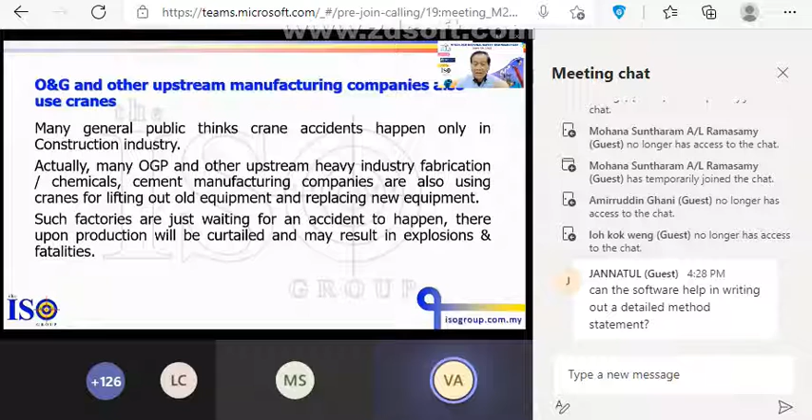Such factories are just waiting for an accident to happen. Thereupon, production will be curtailed and may result in explosions or fatalities, and a lot of answers to give in their reporting.

All our clients include oil and gas, petrochemicals, cement manufacturing. One we had is 4 factories and 40 batching plants, steel mills - 65 of the Fortune 500 companies are our clients.

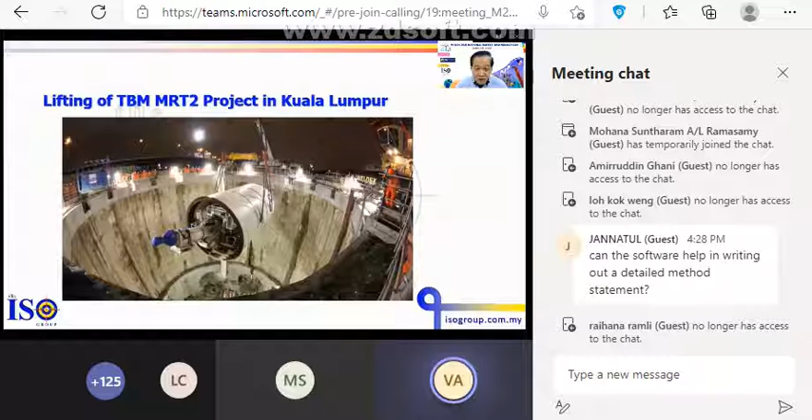Our training covers even participants who are workers with the MRT Line 2 project, underground and tunneling only, not the elevated. And that carries 600 tons, but modular.

We have come to the end of our presentation, and we hope that, number one, we have addressed the fear that being a crane lifting planner is not, after all, a huge and risky task.

We have overcome the feeling that crane lifting planning is a hot, muddy, dirty, dusty profession. To encourage more to join this profession, we aim to build an ecosystem to bridge the 25,000 vacancies in Malaysia and many thousands abroad. We want to open minds that crane lifting planning is critical for varied industries, and spark interest from various stakeholders - crane vendors, owners, rental companies - all final users, to find it beneficial to involve their lifting team members to take a serious view at lift planning, and respond to the requirements to comply with the Malaysian Department of Occupational Safety and Health Special Order Number 2 of 26 October 2021 on management and safe operation of mobile cranes. This will help eliminate current high accidents, improve supply chain delivery, reduce project or turnaround delays, and eventually increase profitability of the manufacturing and construction industry.